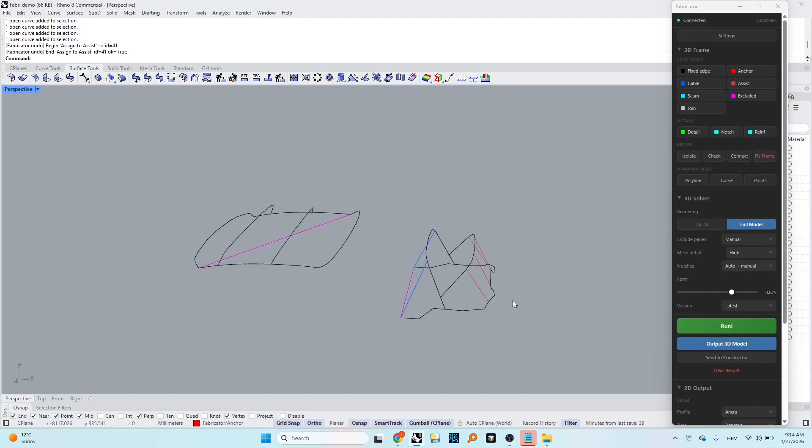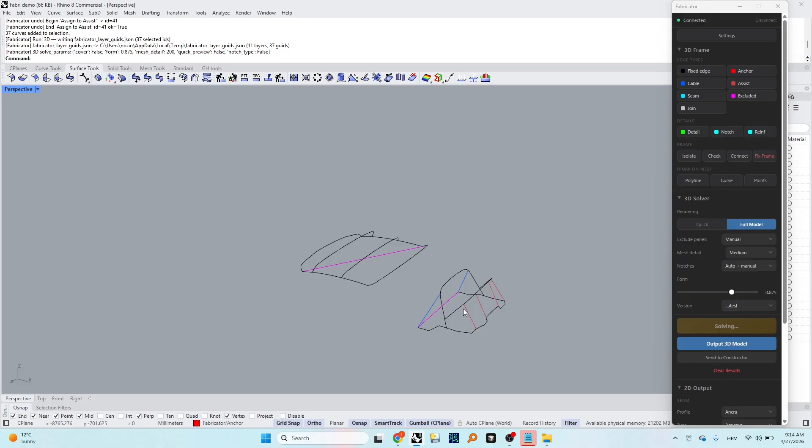Okay, let's do another one with the bimini and sprayhood, and this is we're just going to show you how this all works together, how we can... I didn't show this before, but let's say just this is a little bit lower, but you can solve more wireframes at the same time. So right now I put the bimini and the sprayhood to solve at the same time. They will come out as two distinct patterns.

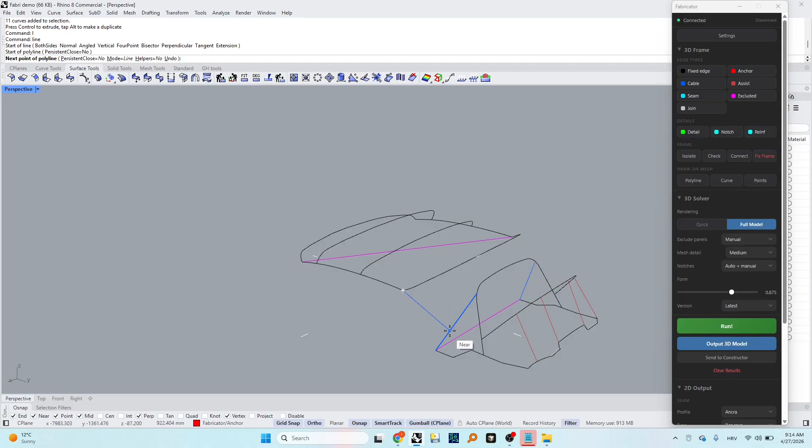But we can make this to be one wireframe. So when would we do that? Let's say we want a bimini and a connector to the sprayhood. So what we do here, let's take a cable edge, let's say, and we want to put it here. How actually we do a connector to the bimini, I would do it a little bit differently. I would do it with two wireframes, but we're just going to demonstrate that you can actually do it like this.

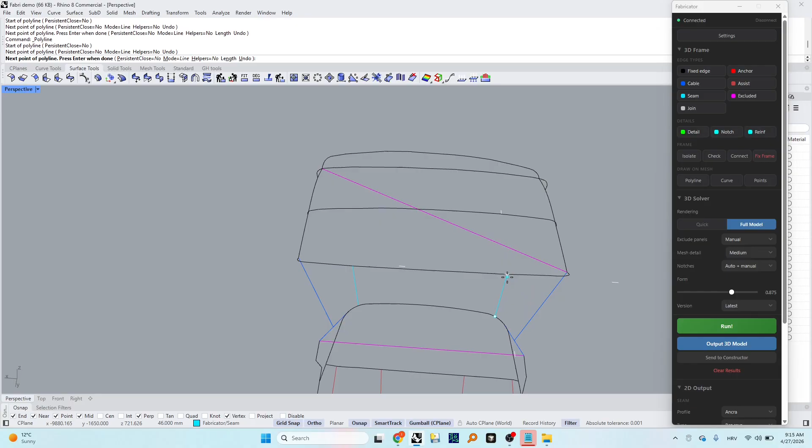And maybe we can put a seam like that, a bit more clean like that. So now we're just adding, these lines are connecting completely to the sprayhood, to the bimini, and now we're getting a single wireframe. We have this crossed out, but this is crossed out twice. The bottom loop is now twice crossed out, but it doesn't matter. It's fine. Let's see if we can process this.

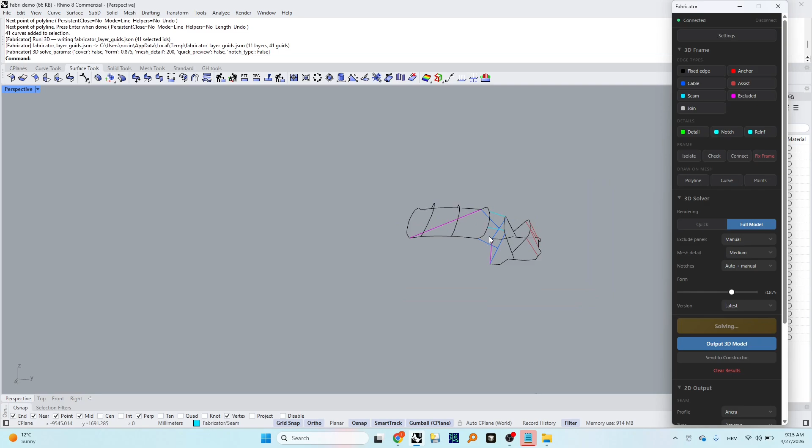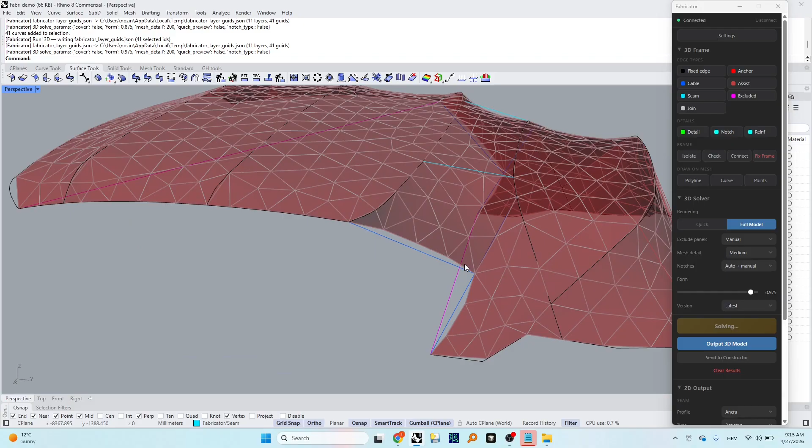All right, so now you see that you're getting a single... Let me crank this a little bit to a normal value. Let's put 0.975. Run it again. And you will see you're getting a kink here. This is getting pulled on the wing. So yeah, this is a little bit better now.

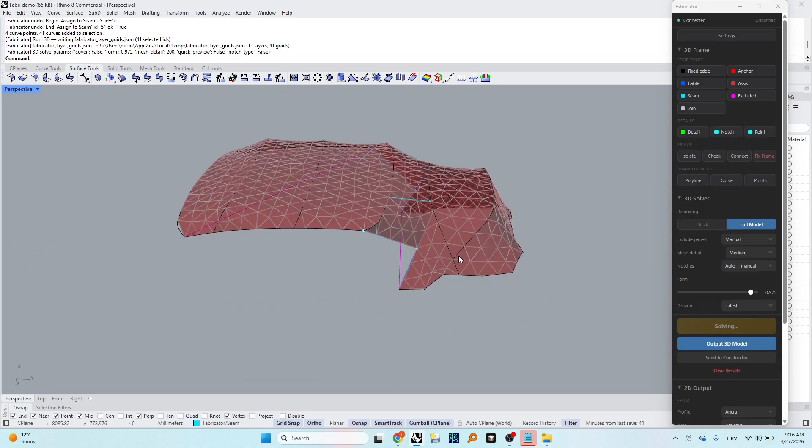So you can play here. You can maybe put this as a seam, and then it will allow the wing to pull over there, pull forward. This is just using all the principles that we were talking about in earlier videos. So now if you do that, see this wing now is allowed to pull, and this is stretched out.

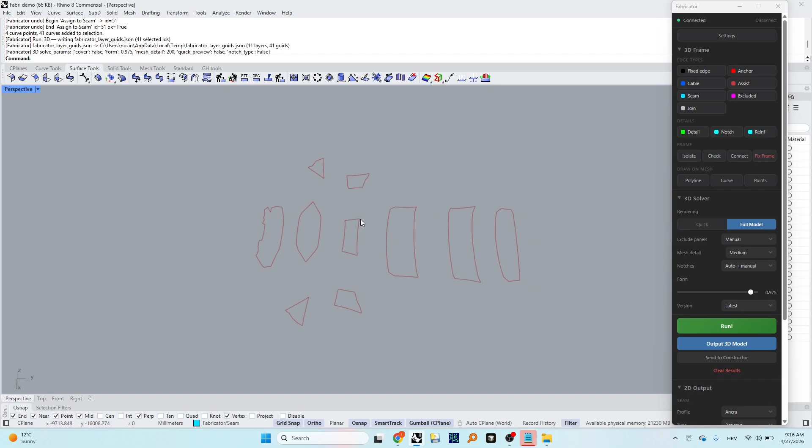You still get a single sprayhood, with there's a kink here. This will disappear if we put a larger resolution. The connector at the back.

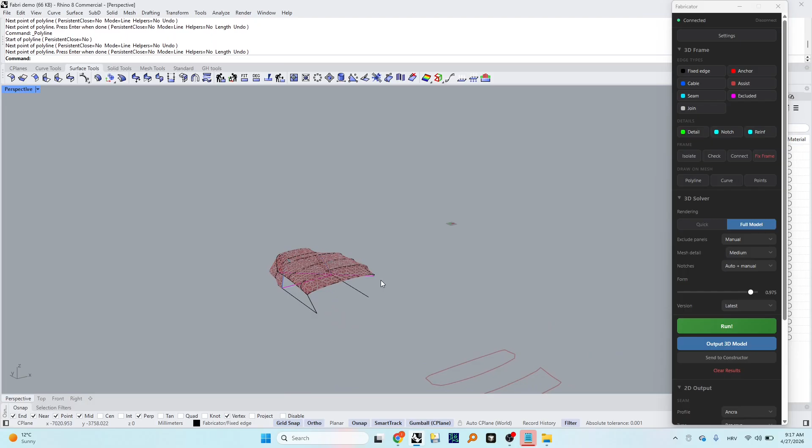Right, but then you can take it even further. Let's put, let's say we want panels. So we're going to draw some panels here, like that. Let's put the back panel also.

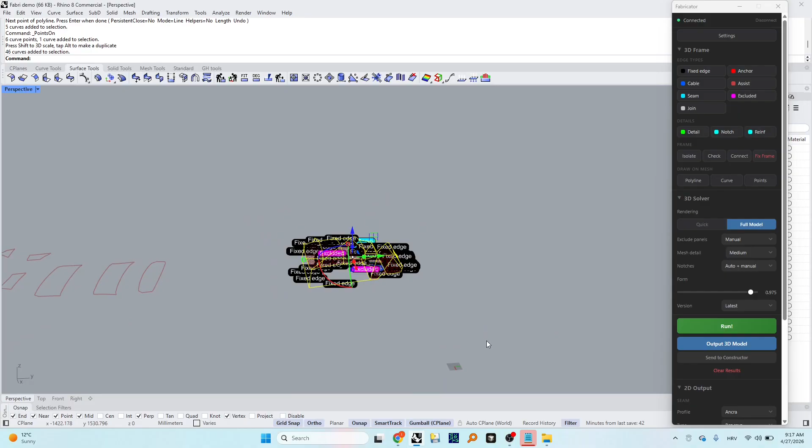All right, so now we're getting... turn on the control points, and we're going to open those a little bit outwards, like that. See if we get something. But now we have the loops crossed out here. So this will probably not work. We will need to remove... Oh, it did work. Okay.

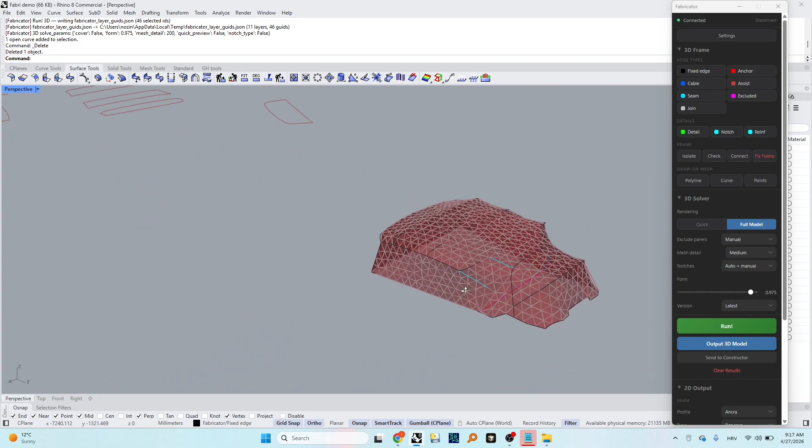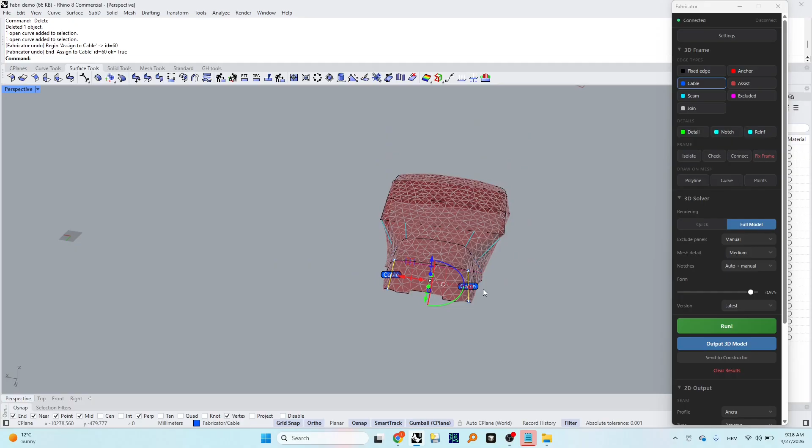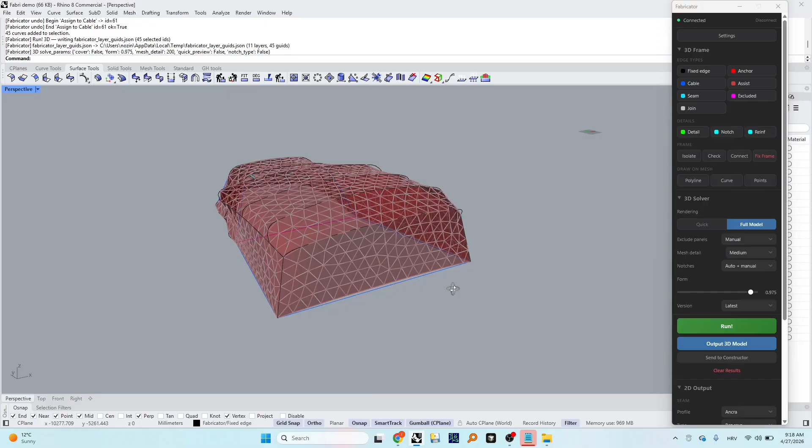That's fine. Put the cable here. Now if we put cable here on the bottom, we will get like side panels with two connection points. Get an arc here and an arc in the bottom. A little bit because we didn't put very high tension. Like that. You can keep doing that. If you want a zipper here, you can just add a seam.

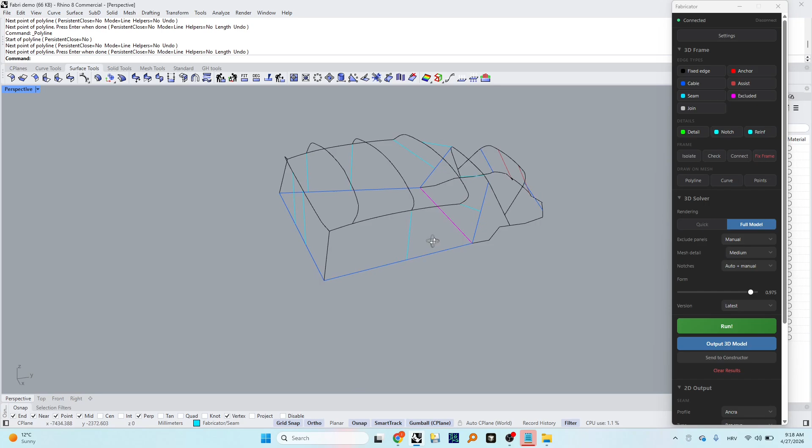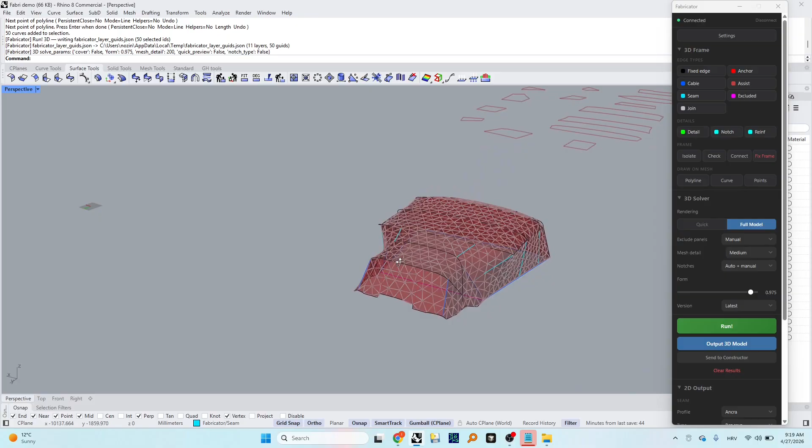So you want a zipper there, and for some reason this is maybe a central door. And we wait for it to solve. It's just going to split all of these panels into smaller parts. Here you go. The door panel, the back panel, split out, and you can keep doing this as much as you like.

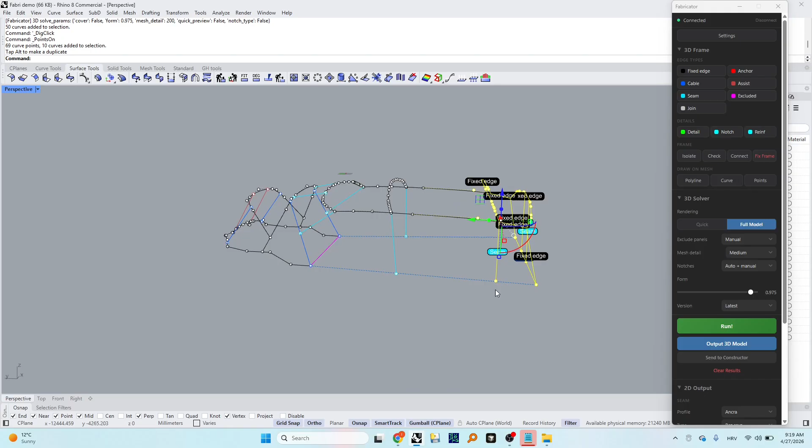And of course, what we said earlier about transformation, if you turn on the control points, hitting F10, you can do the transformations. The only thing you need to be careful about is the connectivity of the wireframe, and this is what happens when you do some transformation.

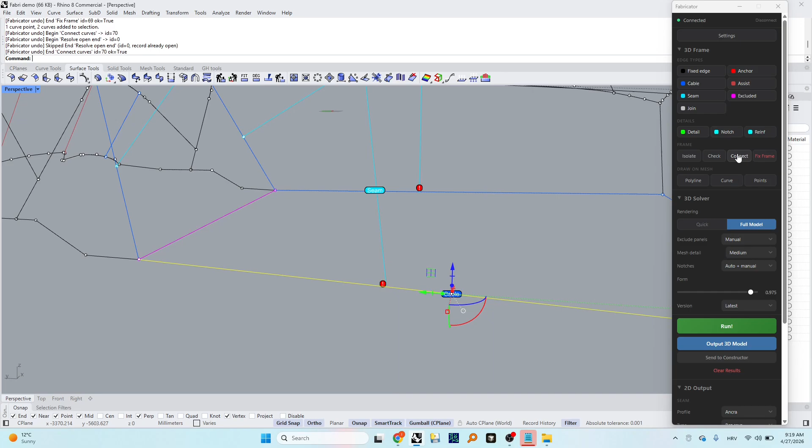These that are not sharing kinks, if we do a check here, see these are going to disconnect. So you can either click fix frame, try to fix it all together, or just manually connect these. You can use it to do it by hand as well, but these tools work pretty well. Check again, and now it's fine.

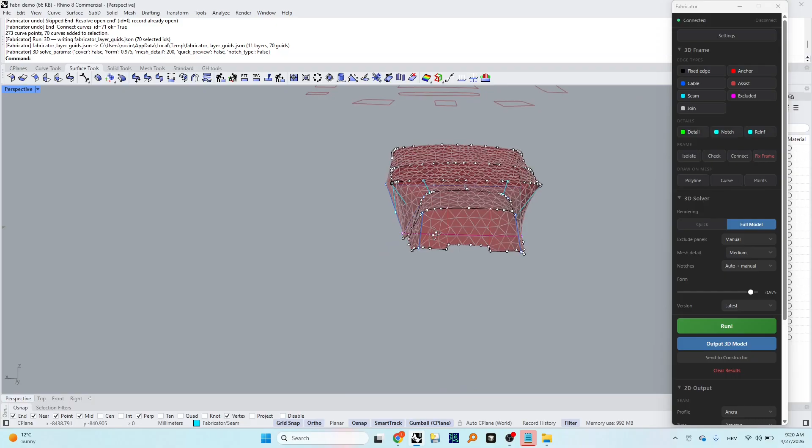This you can run. You'll get a much longer bimini here, but this is a valid wireframe, and it will process. There you go. The whole thing is processed again, and you can keep adding this. You have a, I don't know, you have a, let's say there's more.

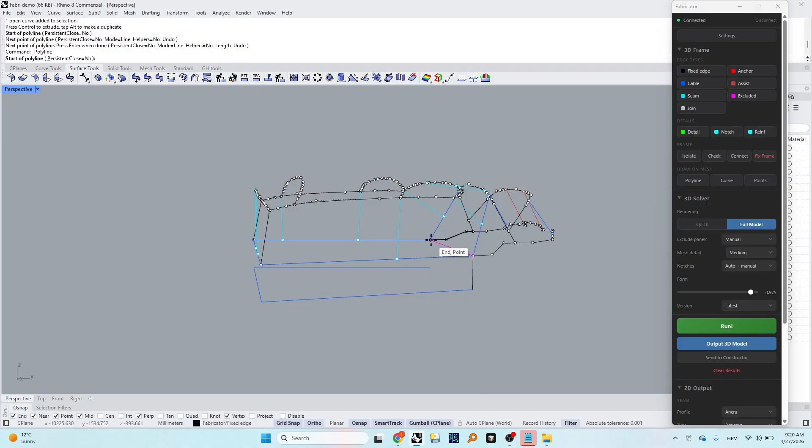There's one more level. Take this down. Literally anything that comes up to mind, if it's a valid wireframe, it will process. There will be a seam here. These bottoms are going to be in one piece. Oop, it did not process for some reason.

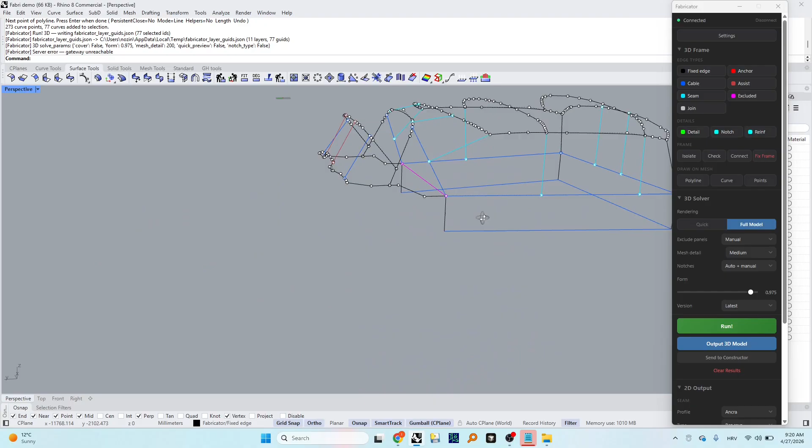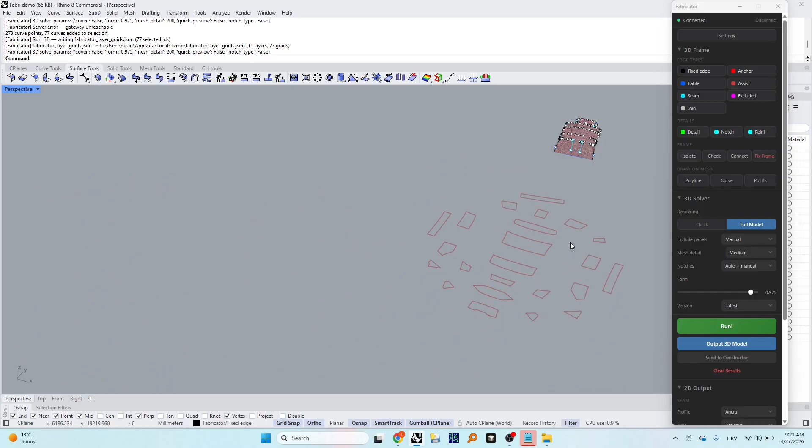There we go. And you can see the bottoms, all of this. And for segmentation also, it works.

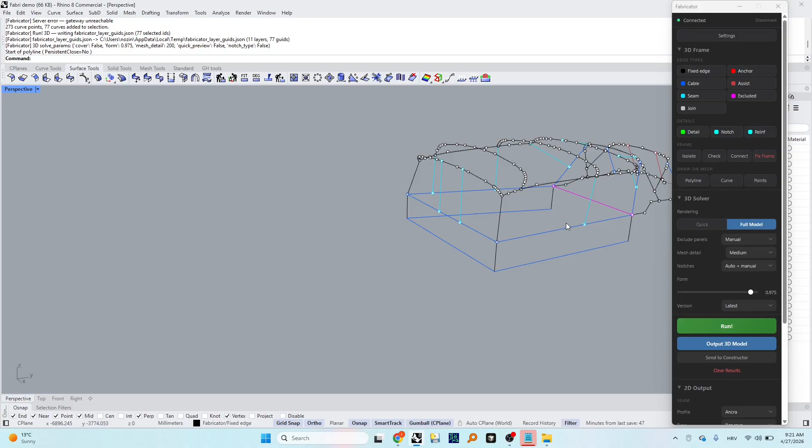So if you use a fixed edge, these lines are going to stay put. If you use the cable, it will be form findable. And now, let's say you use a join, you will get a cut here. So this is going to be like a dirty solution. But if you put join here as well, let's say this is all going to be one single panel.

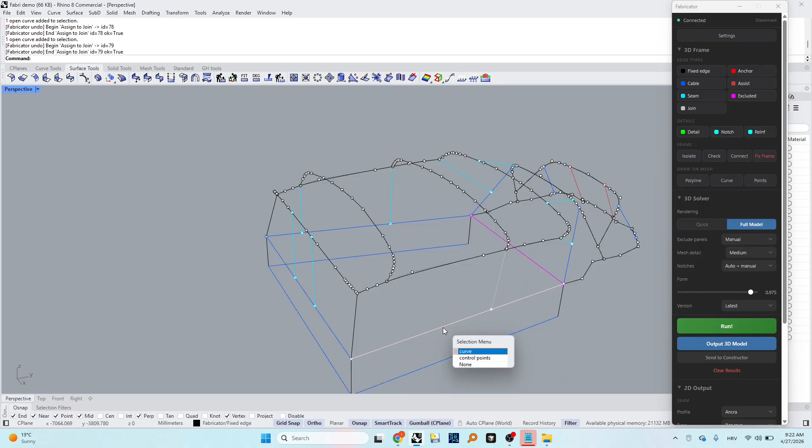And this is useful for when you're leaning, let's say, on a fence. If this was a little bit more outwards, the bottom was a little bit more outwards, and it was leaning with an angle over the fence, it would join the panel there.

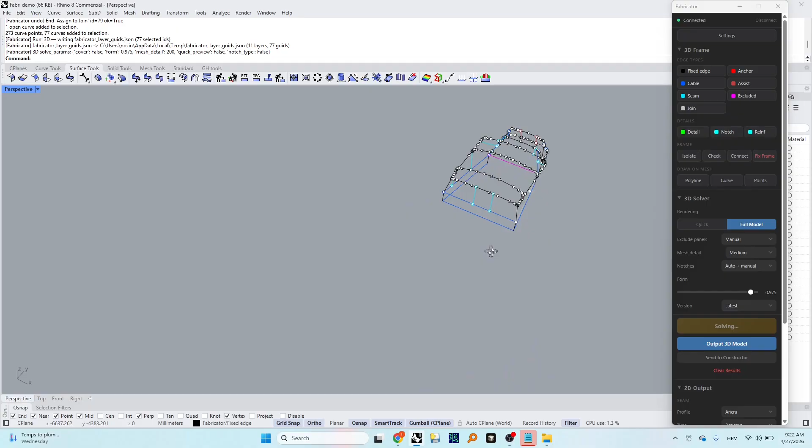Let's just see if this is going to work. When we join these, it should produce a single panel on this side. And this is the single panel here. So it does work.